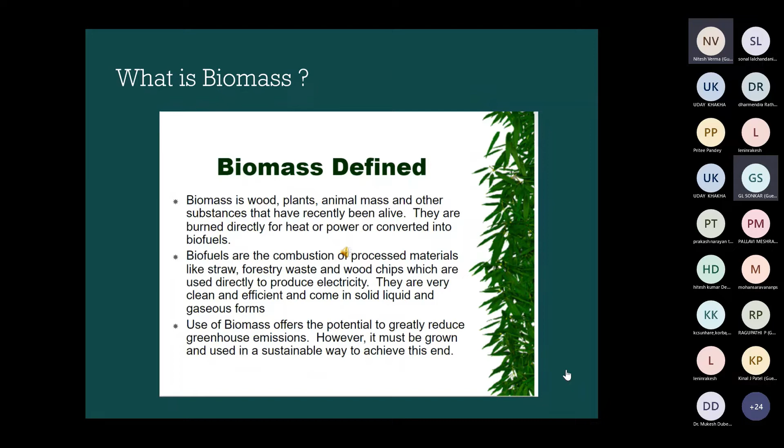So what is the biomass capacity? If we see on all India basis, we have 145 million metric ton of biomass, that is equivalent to 32,000 megawatt generation, and out of which around 18,000 will come out of agri waste only. The total biomass capacity is 145. Correspondingly, 32,000 megawatt can be generated, and from agro it is around 18,000 megawatts, and from forest and wasteland

it is around 14,000. So the main focus is on the agro 18,000, which the government is targeting to bring in. And out of this 18,000, 6 to 8,000 is in North India, where the problem is. So it can generate 45,000 million units of electricity if we harness the opportunity.

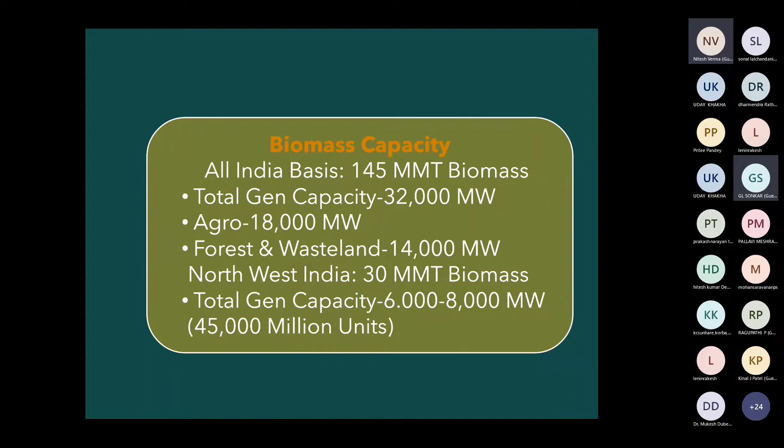And if we see what is the distribution of agro waste, so rice straw and husk, there is some estimation up to year 2030-31. So you can see that in 2010-11 it was around 172 million metric ton, and by 2030-31 it will be 221, out of which 80 is used as fodder and some part is also used as fuel, and there are other uses.

So the net rice husk opportunity is around 13 to 17 million metric ton, which can be converted into pellets and can be used with coal in power plants. You can also see there is good GCV raw material like groundnut waste and other pulses waste, 6.3, 6.4 million metric ton. Mustard waste is around 11 to 13. Mustard waste is a very desired raw material for pellet making, other oilseeds also, and the location is also in North India, in Rajasthan, some part of Haryana and all that.

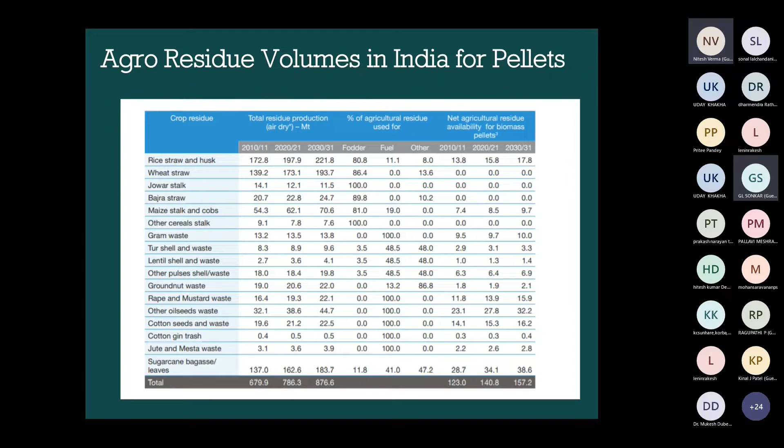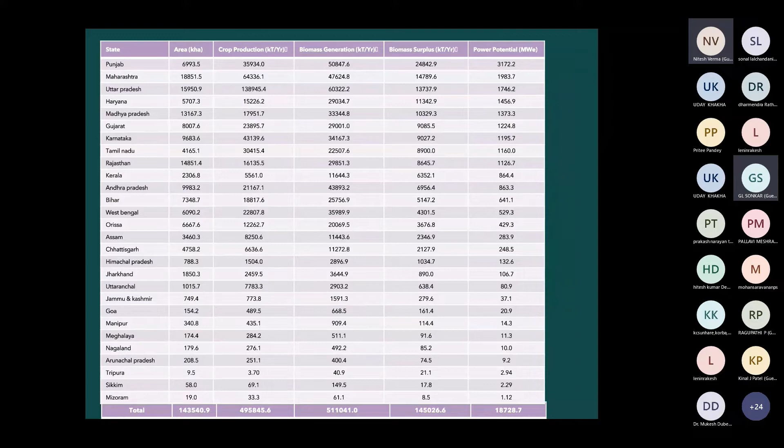So we really have very good opportunity. We have raw material which is available. The thing is that we have to use it, convert to pellets and use with coal in the power plants. And one survey is also done for the states, what is the quantity of biomass available with the states, and corresponding what is the megawatt generation capacity. So in Punjab it is around 3,172, Maharashtra around 2,000, Uttar Pradesh around 1,700. So it goes on, and in India it is around 18,728.

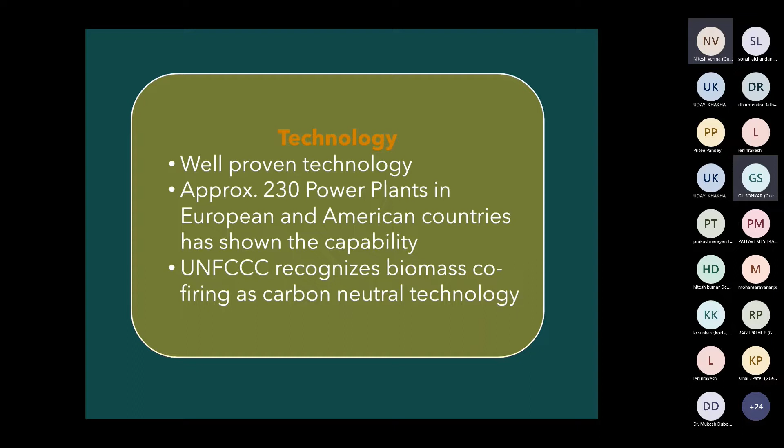And about the technology, the technology is well proven. Around 230 power plants in Europe and American countries are already present. And UNFCCC has recognized biomass as a carbon neutral technology. Why is it carbon neutral? Because the biomass in its life converts more than the amount of CO2 which it will eventually generate while it is being burned. You all know that plants convert CO2 into oxygen, and that way it is carbon neutral, because during its life it has already reduced the carbon which it will generate while it is being decomposed by burning.

And in Europe, you can see there are biomass plants. In UK, Drax has one plant which has a capacity of 7.2 million tons. In Denmark, there are 4 plants of 2.6 million tons capacity. So it is a well-proven technology. And the beauty in Europe is they are standalone biomass plants. So India has to think in that way also. We can develop some standalone biomass plants with large capacity. Small capacity is there, process industry is there, but for power generation, plants have to come.

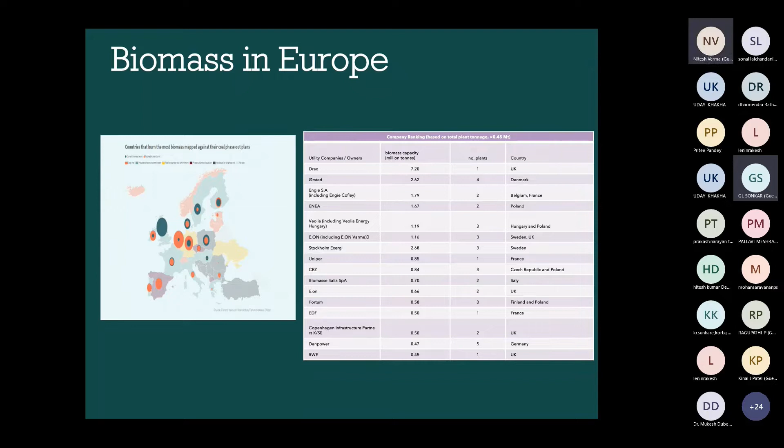Let's see the regulatory part of biomass firing. On 17th November 2017, the Ministry of Power released the first policy on biomass utilization for power generation. That is a benchmark date for power generation from biomass firing. Later in September 2018, the CEA, Central Electricity Authority, specified what is a biomass pellet and what shall be its properties. Then MNRE recognized power generation from co-firing of biomass as renewable, and it is also eligible for non-solar RPO.

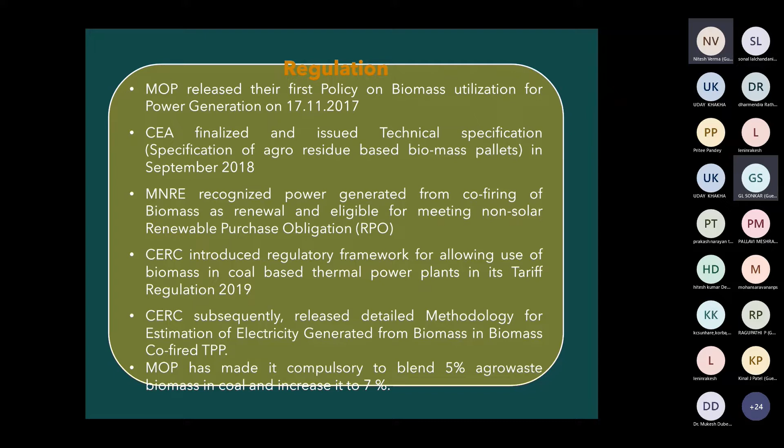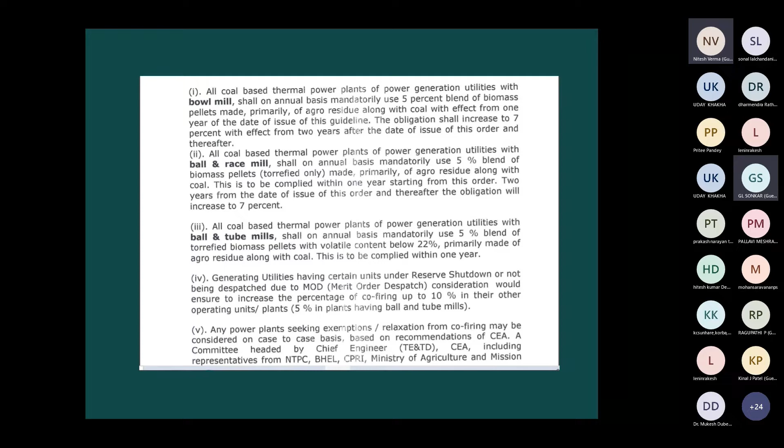And ball and race mill type power plants will also have to make suitable arrangements and use it at 5%. So this impetus will bring co-firing. And the minister also very recently said that you have to use it, there is no second thought in it. So why is the government pushing it? What is the objective? The objective is to reduce the per kilowatt hour carbon emission. So the carbon intensity of India will reduce with it.

It can also be used to generate carbon credits by biomass co-firing. In the power sector, coal is not considered environment friendly. So for sustaining power business with coal, agri-based biomass co-firing will be a breather for the power industry. It will also be mandated to buy some RPOs later for the power industry when the carbon market comes. So it will also give an opportunity to generate your own RPOs.

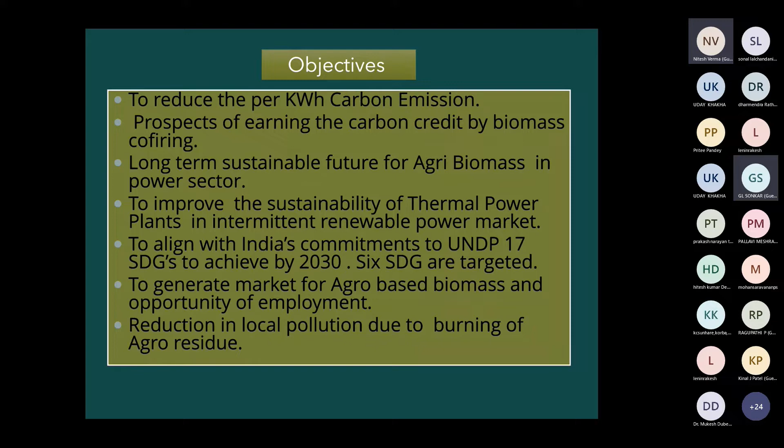India has committed to the UN on 17 SDGs, Sustainable Development Goals, which are to be achieved by 2030. Out of 17, this technology targets 6. I will later show what are the 6 SDGs being targeted with biomass co-firing. It will also provide a market for agro-based biomass, an opportunity for employment in the industry, and an additional source of income to the farmer. And surely it will reduce the local pollution which we see in the winters in the NCR region and North India.

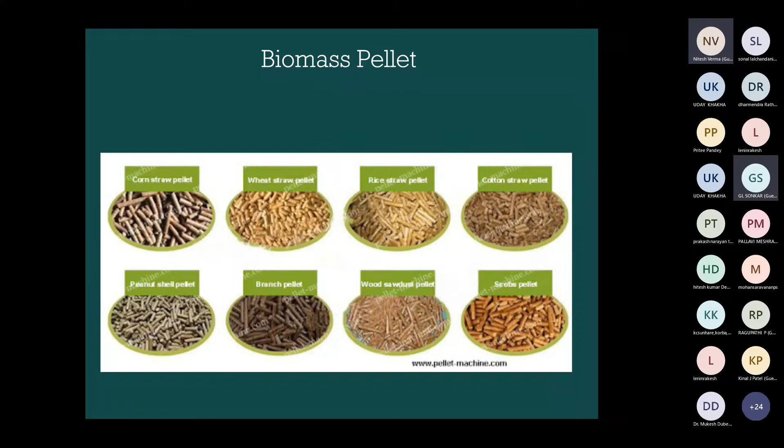What is a biomass pellet? A biomass pellet is compacted agri-waste, compacted with a process called pelletization, which I will show in a later slide. This slide shows pellets being made from different raw materials like corn straw, wheat straw, rice straw, cotton straw, peanut shell pellets, wood sawdust and all. So pelletization is possible for almost all categories of agri-waste.

And how is it done? First, the straws and agri-waste are brought, then ground, then drying is done to remove the moisture somewhat. This figure is not showing it, but there is a magnetic separator used to remove any metal, and a sieve is also used to remove the dirt and mud.

Then a pellet machine is used. It is basically a press sort of machine where the agri-waste is sent into a cylinder and compressed, similar to how an extrusion machine works. From one side the raw material is pushed, and from the orifice it is taken out, then it is cooled, the size is maintained, and then it is sold to the customers.

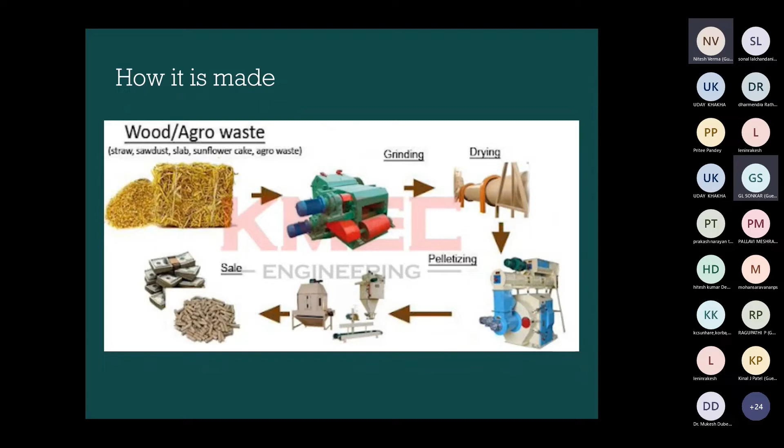The technical specifications are like this. The material is agri-waste, wood and chips, and the shape is cylindrical, around 8 to 8.5 mm in diameter. The length can be from 4 mm to 32 mm, and the base GCV is 3800 kilocalories per kg, but later it was reduced to 2800. Moisture should be less than 8.5%. Moisture is a criterion for rejecting the biomass.

Ash should be less than 5%, and then the particle size. There is a sieve analysis when we purchase biomass pellets, and 75 to 78% should pass through the 1 mm sieve.

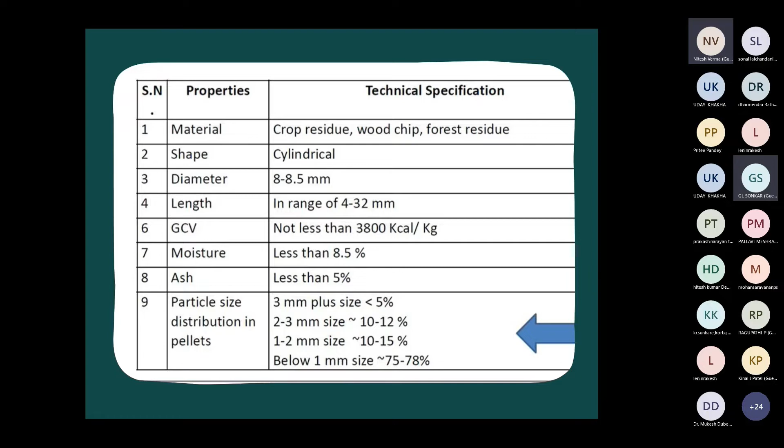Then there is torrefaction also. Torrefied pellets are also there. Storing the pellets is a challenge. They are hygroscopic; they get moisture very easily, and if they get moisture, it is not possible to blend them with coal and use them for power generation.

So the torrefaction process is done to the normal pellets. Before it goes to the pelleting machine, the biomass is roasted, ground, and afterward it is pelletized. It is heated without oxygen, so it does not actually burn, but the moisture and other things get removed.

Why is torrefaction done? It is obviously to improve the combustion properties, and if the moisture is low, the heat value will be high. It also becomes brittle, so grindability increases, and it becomes somewhat resistant to water absorption. So the storage becomes easy.

Biomass is also, you can say, more prone to biological activities. We also know that if you keep biomass here and there, it will get fungus and all that. But torrefaction makes it better and more resilient to these things. And also it increases the energy density of the fuel and thus reduces the transportation cost.

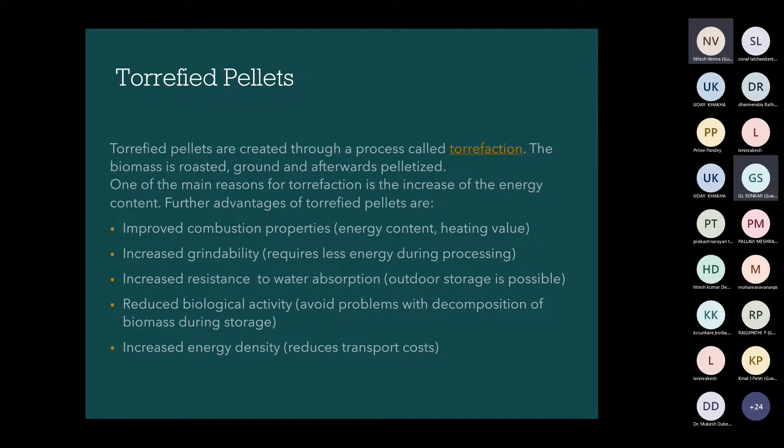So I will show you two case studies. First is the experiment we did at Dadri. So this was the entire setup. This is the full power plant setup which I'm showing, and this slide is very informative.

So it was decided that we will use 5% pellet and 95% coal in one of the mills in a 210 megawatt unit. A 210 megawatt unit typically has 6 mills, out of which 4 remain in service, with one mill typically running at 30 to 35 tons per hour. And subsequently, we will make use of biomass in more than 1, 2, 3, and 4 mills.

So this arrangement, which is at the right hand side, is how the pellet mixing was done with the coal. I'll just give a brief, maybe you are aware of it, of how the coal is shipped to the bunker, which is the source of coal to the mill. The coal is stored in the coal yard. Before the coal yard, it is crushed, and the crushed coal is stored in coal yards.

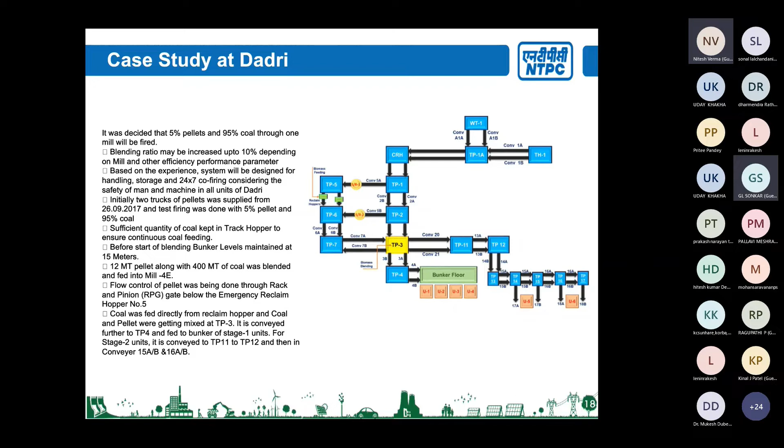And in the findings of the experiment, it was observed that the mill was running at 32 tons per hour, and the mill inlet temperature was maintained at 160 degrees. Outlet was maintained at 56, which we gradually increased to 175 with outlet temperature 65.

The interesting thing I'd like to point out here is that the main constraint in biomass firing is the mill inlet temperature. I think all are aware of the milling process in the power plant. Biomass has a large amount of volatile matter, which makes it very prone to fire if it is kept above 200 degrees. So the main limitation for burning biomass in a power plant bowl mill is that we have to keep the mill inlet temperature below 200 degrees centigrade.

Subsequently, if we keep the temperature below 200 degrees, whereas the normal is around 280, the mill outlet will decrease and we will lose a little bit of efficiency. So on the day before the firing, you can see the mill outlet was 80 degrees. On the first day, the mill was run at 65. The mill inlet was maintained at 170, and after that, there was no abnormality in anything.

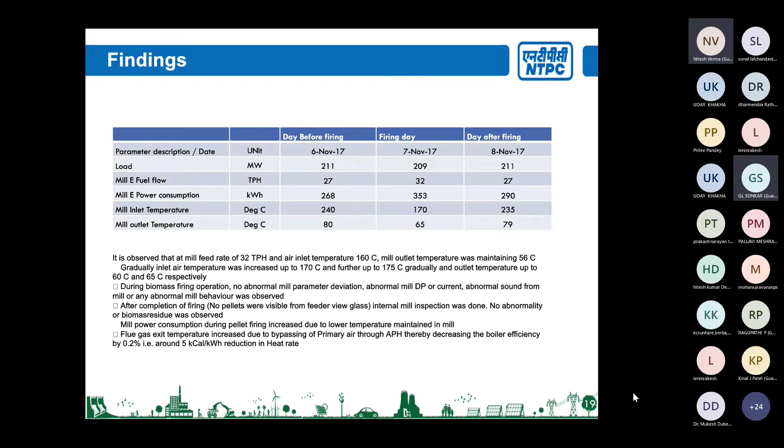Obviously, when we run at low mill inlet temperature, some of the air will bypass the air preheater, and around 0.2% of boiler efficiency was reduced, which is equivalent to 5 kilocalories in heat rate terms.

Later, upon the first success, we increased the quantity of biomass, and from 873 we increased to 1936. In April, initially we fired in unit 4, then we fired in all the units there. The only thing was that due to COVID, we did not receive the large quantity which was planned. So we were planning to go up to 20, but we couldn't do that.

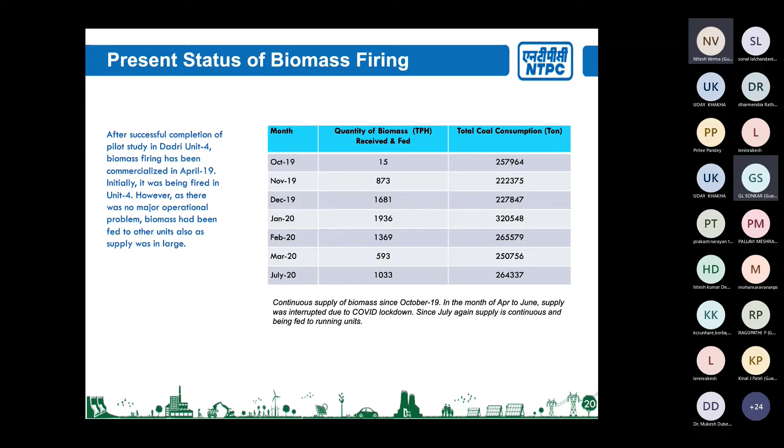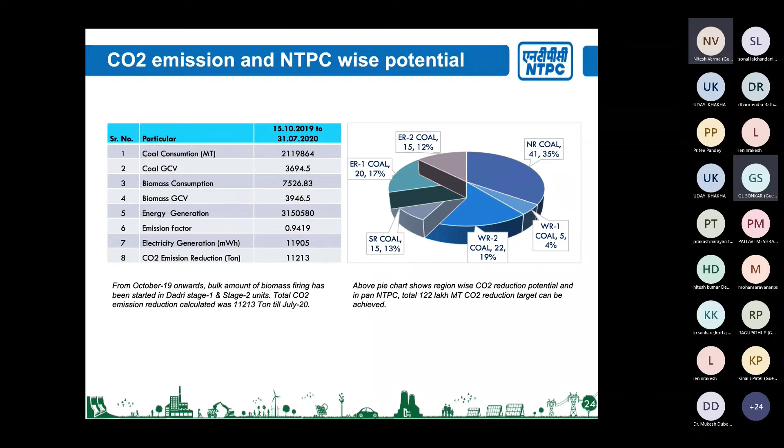At that time we also did an analysis of how much CO2 we will reduce if we use the biomass pellet. So total tons of CO2 reduced was 11,213 pan NTPC, and if you see region wise, our region will use 35%, reducing 41 lakh metric ton. So it's a good quantity. It will be a great achievement if we are able to utilize so much biomass.

Any business needs capital support. People will not be very happy if we increase the power price by 10-15 paisa and say that we are using a biomass fuel. So there should be some mechanism to support it. One mechanism is if we claim the carbon credit and use it to support the additional cost of biomass firing.

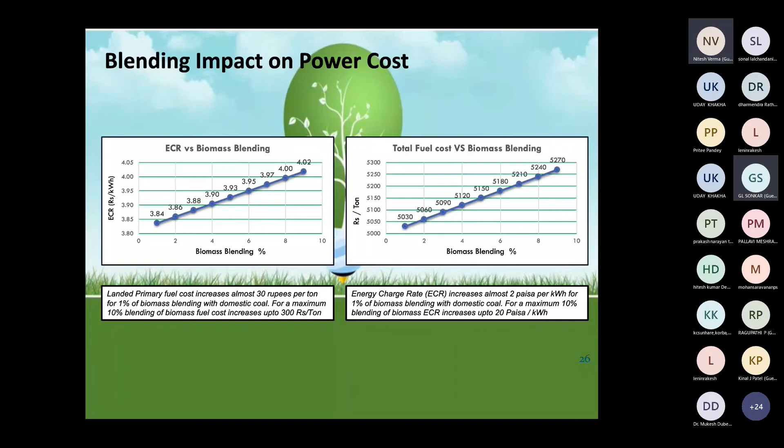Without blending, the energy charge rate shown in the left hand side figure was 3.84 rupees per kilowatt hour. I think 3.82 was the base rate, and with 10% blending, the energy charge rate increased to 4.02 rupees per kilowatt hour. So there is a 20 paisa per kilowatt hour increase with the blending. And there are 2-3 aspects of this cost increase also.

Our tender says that we can accept biomass from 2800 to 4200 GCV. So the rate is also defined like that. For 2800 GCV biomass, the rate was fixed as 4500. And we have to bring the biomass from the location, so the average cost of transport was 2,000 rupees per ton. So the landed cost for 2800 GCV biomass at Dadri was 6500, and for around 4200 it was 8670.

So you can see the rate of fuel per 1000 kilocalorie, which we use to determine the ECR, which is the base calculation point. For 2800 GCV, it is coming as 1.73 rupees per 1000 kilocalorie, and for around 4200, it is coming down to 1.69. And without biomass, you can see the rate is 1.43.

So it is proposed that we purchase biomass of higher GCV, which comes from agri and oil plant residue, like peanut shells, coconut shells. It will give a high GCV, and also the impact on cost will reduce.

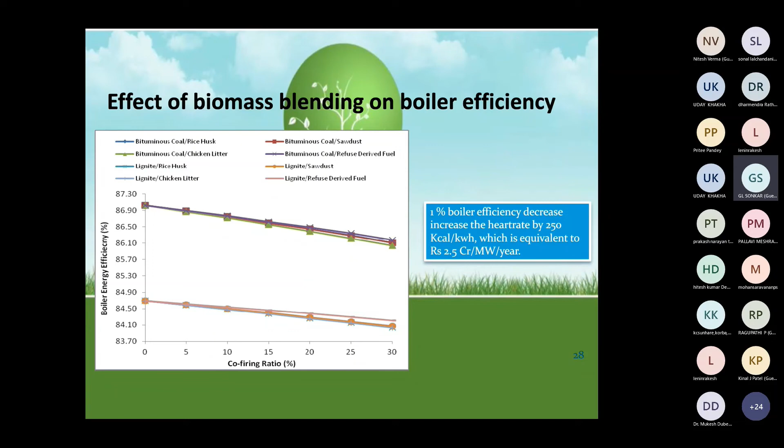So we have made a calculation for NTPC. What is the cost of carbon we save if it is credited to us? Then the additional cost of biomass co-firing can be subsidized. Based on our generation, coal capacity, coal used, and if we do 10% biomass blending, in 10 years, 233.8 million metric tons of carbon can be reduced.

And the increased cost is around 47,225 crore rupees, and the loss due to efficiency is around 2,695 crores. So the cost comes out to around 24.27 euros per ton of carbon. And recently the cost is around 22. So the cost is coming fairly equal to the rate of the Euro ETS, which is around 22 right now.

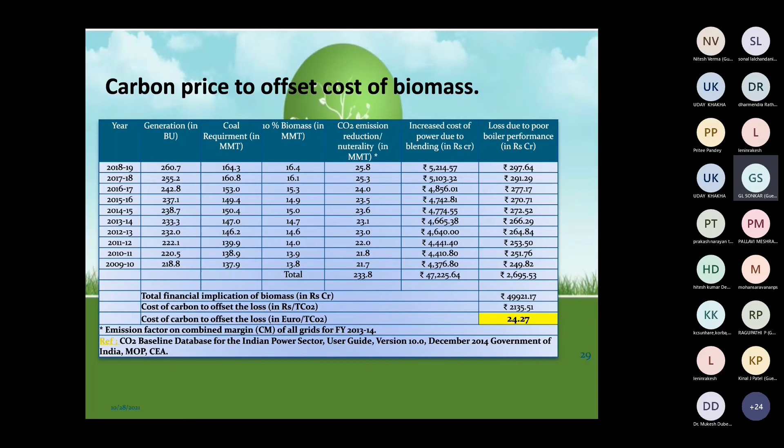So if the government brings a carbon market in India, then the biomass pellet can be used without hurting the consumer, because eventually the consumer has to pay for everything we do in the power plant. So I am concluding my session with this remark: the Indian power sector can survive if biomass co-firing is sustained or done.

In terms of land use, it is 5 to 6 times better. 1 megawatt of an agro plant will generate as much benefit as 5 to 6 megawatts of solar and wind. Certainly RPO is there, so we can take RPOs, and with the increase in biomass use, we can surely reduce pollution. We will also meet our SDGs.

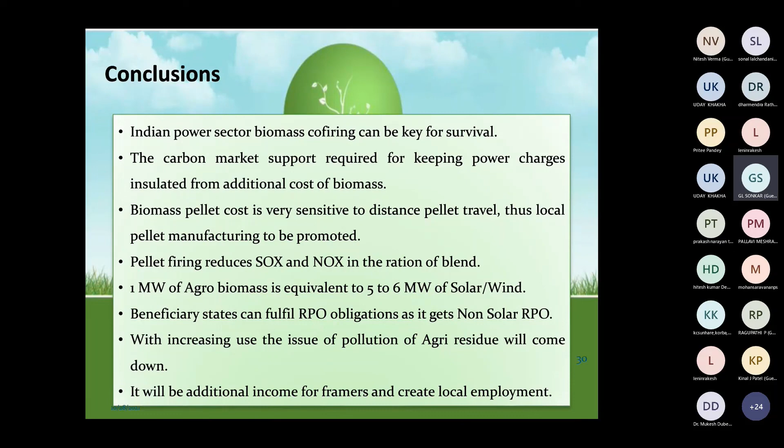And therefore, what the power sector should do is push for comprehensive and encouraging biomass co-firing policies, and also develop manufacturers. The government should put some policies so that pellet manufacturing is done on an economical and large scale.

We should also, until the carbon market comes to India, ask for, as a power sector, if we are using biomass pellets, banking of the carbon. If there is further increase in the percentage of biomass co-firing, then the capex of FGD, DSI and others can be reduced. And the states which are not able to handle the agro-waste biomass, like Punjab and Haryana, should also be supported with financial inputs. So this is also something the industry can propose.

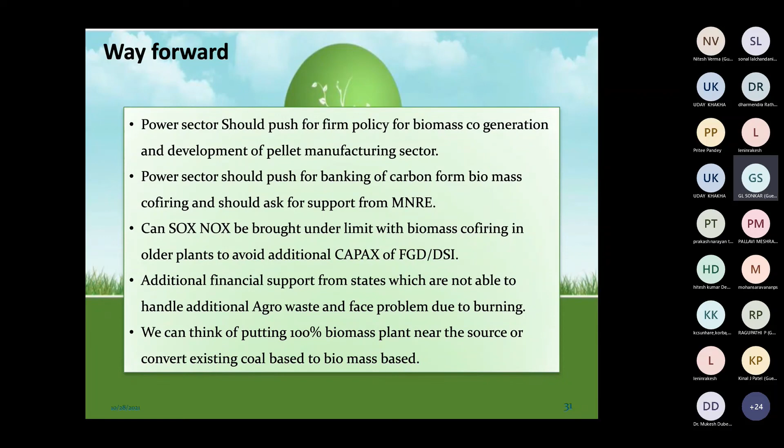And later we can also push for 100% power generating plants based on biomass. Thank you, that is all from my side.